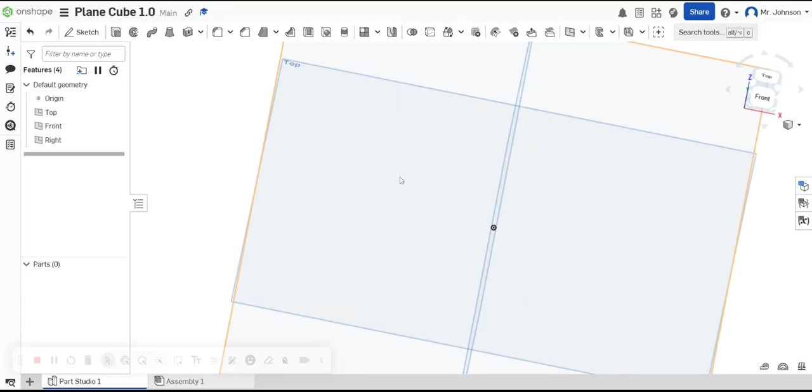Okay, so hopefully this goes smoothly. There's a few things you should know. You definitely want a mouse or a trackball because when you do a left click, it selects things, versus a left click which allows you to highlight things, whereas a right click lets you move things around. Your center click lets you zoom in and out, and also pan back and forth. All of that working together, you need the 3-button mouse to really make this project work.

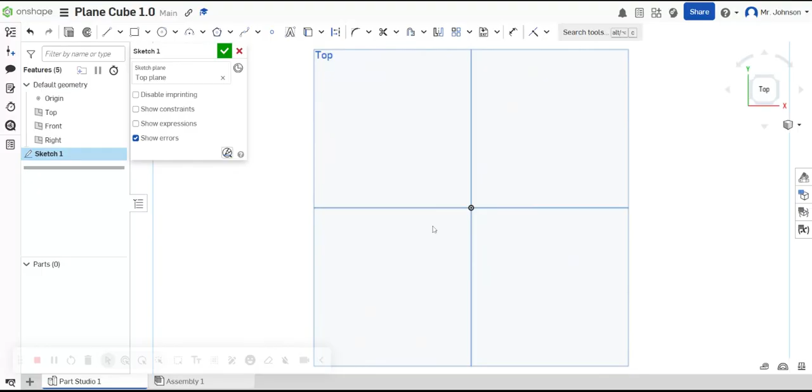So the first thing I'm going to do is sketch. I'm going to hit sketch and click on this top right here so I can make a sketch, and I'm going to go to a top view, so I'm looking straight down on it. There's a few different rectangles you can make. The one I want is a center point rectangle. So I'm going to start here at the origin and work my way out.

Automatically this line is parallel to this line, the top and bottom, depending on how you're looking at it. The left and right are parallel, so that's a rectangle, but I want to make this rectangle a square. So I'm going to come in here and dimension it, click on this little bar and bring it up. I'd like that to be 2 inches. Now I'm going to do this one more time, making that side 2 inches as well. I don't need to do the opposite sides because they're automatically 2 inches since it's a rectangle.

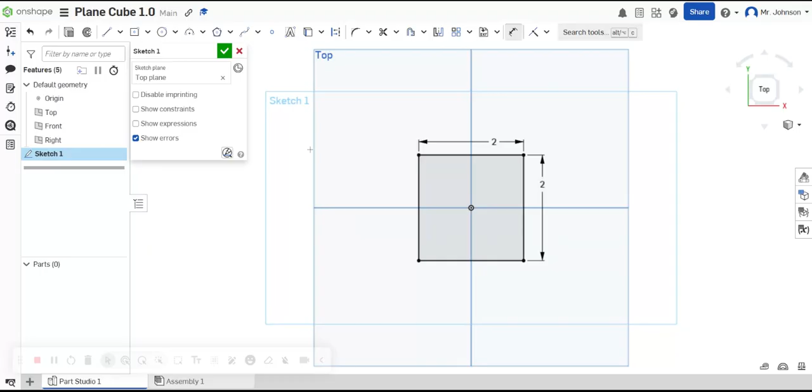Now if you're in centimeters, what you need to do is click on this little hamburger, those 3 little lines right there, and go into workspace units. I have them in imperial units, inches right now. But that 2 by 2 square centered at the origin, I'm good to go, so I'm going to finish up that sketch.

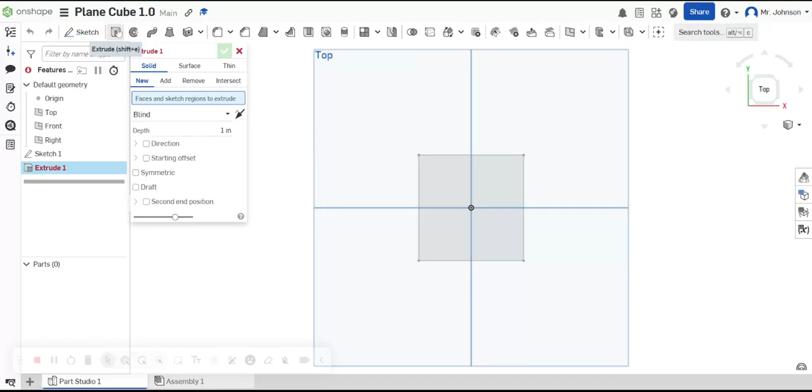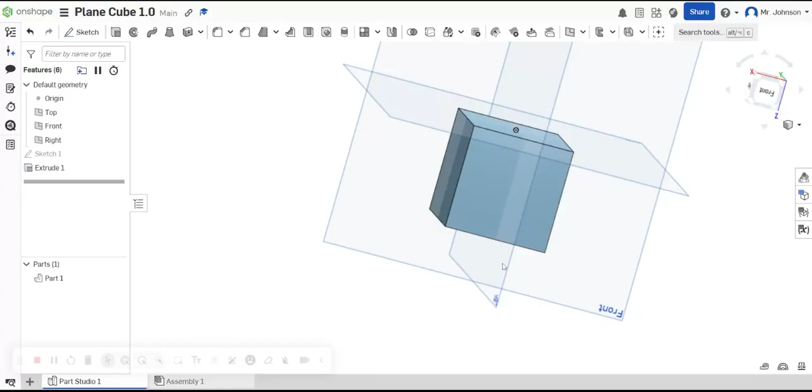Now the next thing, once I finish that sketch, is I want to make this 3-dimensional, so I'm going to use the extrude feature. If I hovered for a split second, that would have been Shift E, which is extrude, and I want to extrude that 2 inches, then click this little green check, and you're like, but that didn't do anything. But if I hold down the right click and rotate, I can see that I now have a cube that's 2 inches on each side. So I drew a 2-inch square in a sketch, and then extruded it 2 inches so I can see all of that.

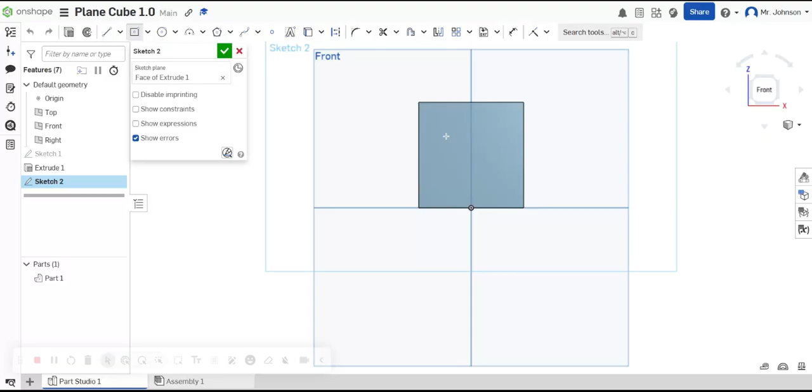Now on any one of these sides, it doesn't matter which one, we're going to create a new sketch. So I'll do a right click, new sketch, and zoom in on the front. In this one, let's go with the square, and I'm going to put a square in the middle here. It doesn't matter which rectangle tool I use, I just don't want it to touch any of the edges. If it touches an edge, it automatically constrains it to be attached to that edge, and that would be horrible.

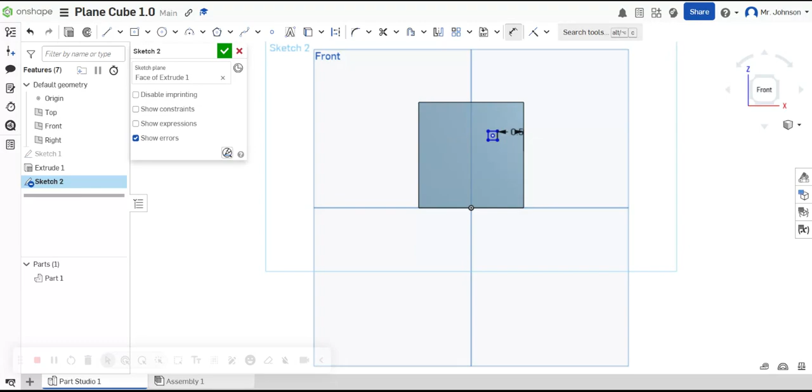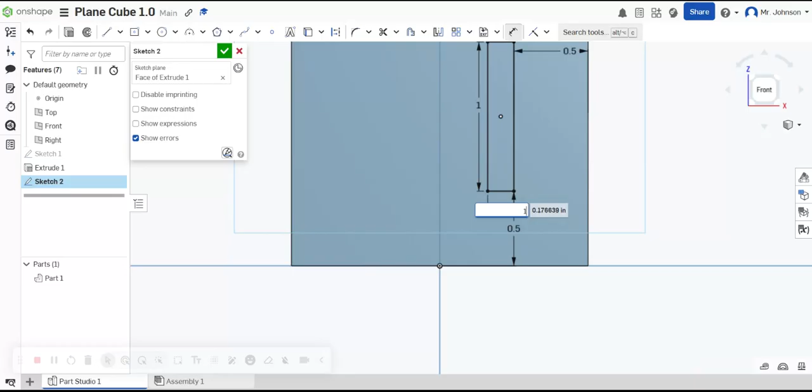At this point, I'm going to come in here and constrain it from this edge to this edge. I'm going to dimension that to be 0.5 or half an inch. You could type 1/2, it'll totally do it. And then from the bottom part to the bottom, again, 0.5 or half an inch. Then I'm going to zoom in using my scroll wheel. I want that to be 1 inch, and I want that to be 1 inch. And I have just made a 1-inch square that is half an inch from each side.

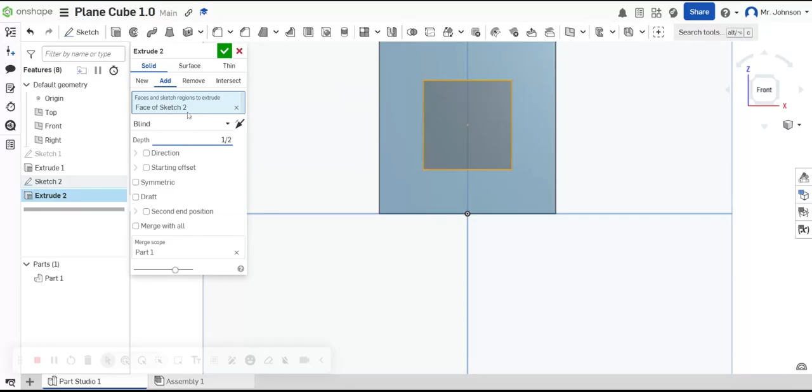I'm going to finish that sketch. I'm going to go to extrude again, and this time I don't want to extrude at 1, I can do 1/2 or 0.5, and I want to make sure it's an add, not a remove, an add. I click that, and so what I'm looking at right now is a half-inch square sticking off the side of that.

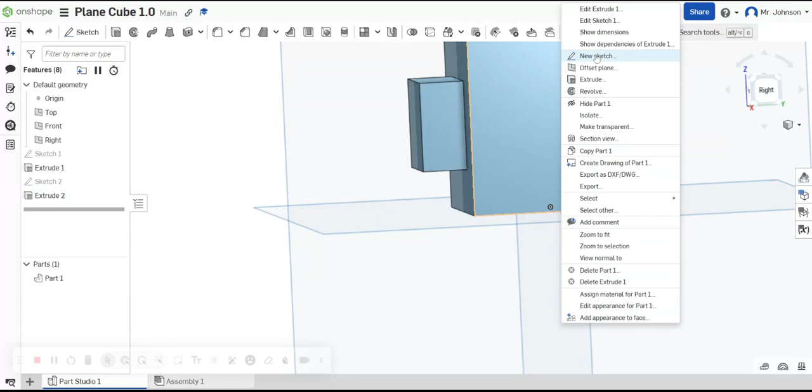Now any side that is adjacent to that, I'm going to come over here and do again a right click. Oops, I'm going to click the green check mark so that I finish that extrusion. I'm going to click right here, new sketch. This side, I'm going to put a circle on it, and there's a couple different circles, center point, that's fine.

I'm going to click on the circle and draw a circle. See, like right there, it's going to center it right above that midpoint, and that's fine. I go to dimension, and I'm going to go into the middle here, and I want it to be a 1-inch circle, and I want it to be a half an inch from the side, so 0.5 or 1/2. And then from the top or bottom does not matter.

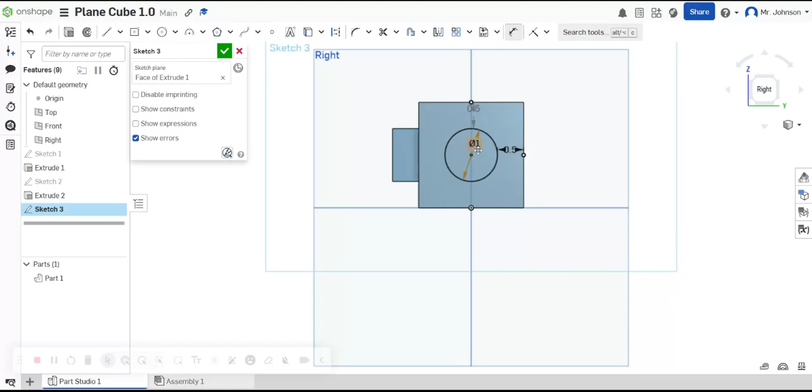At this point, I'm going to finish that sketch. I'll hit extrude again and extrude it a half inch. When I hit the green check mark, I have my circle peg and my square peg.

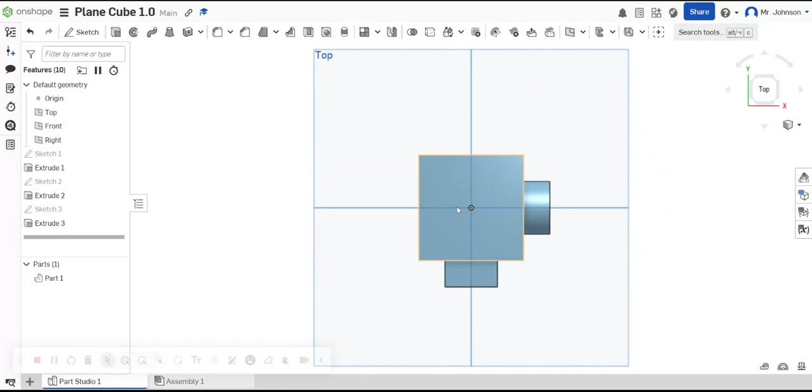Now going to the top here, this one right here, there's a couple different ways I can make a hole into this. So I can come in here, and really the first thing I want to do is create another sketch.

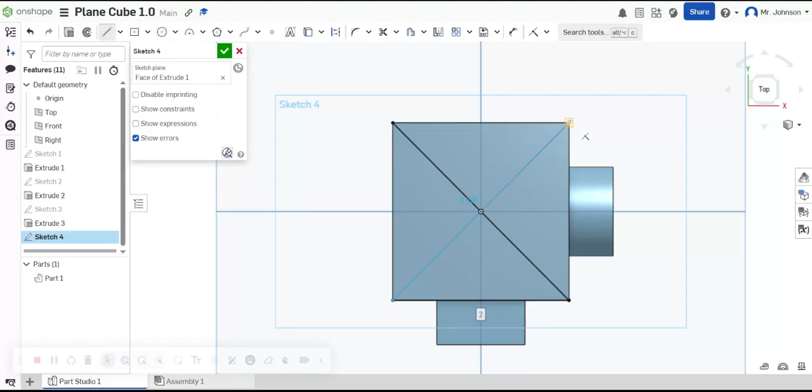I'm going to hit new sketch. There's lots of ways to find the center of this. One, it's already marked, so I could use that. If I didn't know that, I could use the line tool and do diagonals. If I do a diagonal there and a diagonal here, where they intersect is the center of a circle.

When it first starts up, it's like a quarter inch. It's way down here. It's something like this.

So there's lots of different ways to do this. If you're using the hole tool, the cool thing is you could do drilled, clearance, tapped, PM - I don't know what some of this is. I'm going to go with drill. Tapped would be threaded, and you can pick the thread size and do all sorts of different stuff. By default, it's at blind.

There's all sorts of different settings, so if you're using the hole tool, this is where you would go to do it. But for some reason it's not letting me, so I'm going to cancel out of this. Normally what I have to do is go into that sketch 4 and edit that sketch.

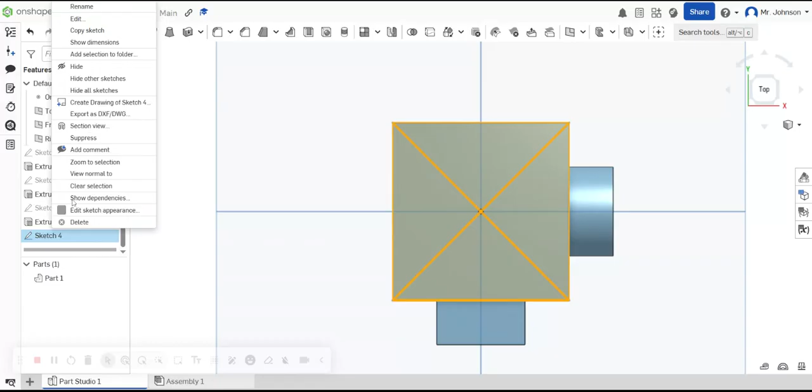I'm going to make a circle right here, using the center point of a circle. Again, I want it to be a 1-inch dimension, so you can just hit D, the letter D for dimension is a shortcut key. 1, enter, and that centered it.

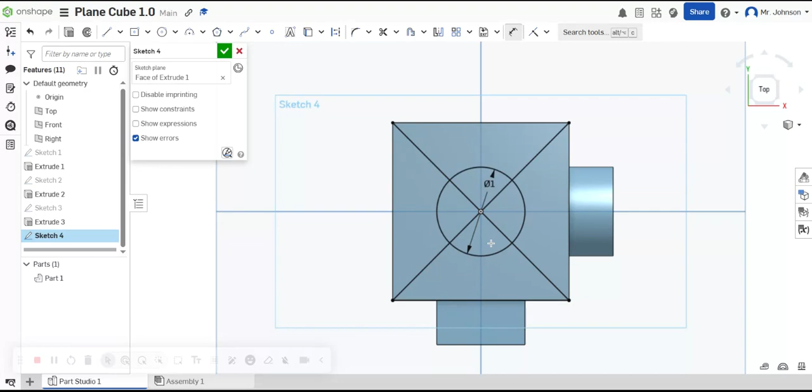That's absolutely centered it. Now if I finish that sketch and go back to the hole tool, when I click here, there it goes. Right now, let's say I did tapped, and it gives me my threads. If I were to orbit this, well, that's not a very fancy hole, it doesn't go all the way through very far, so it doesn't show it as well as it should.

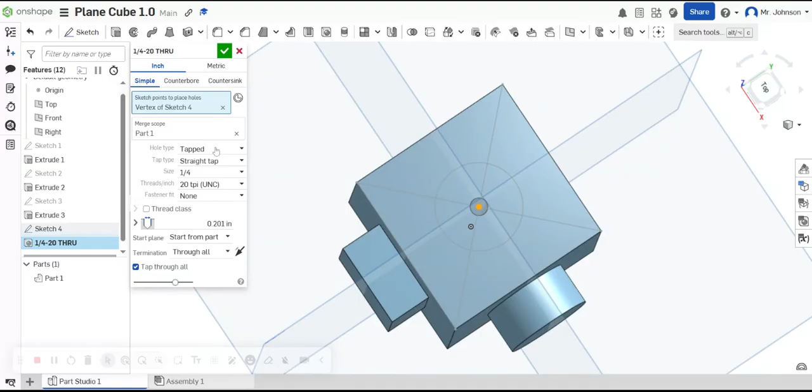But I could use the hole tool and do a 1 inch. So scroll, scroll, scroll, here we go. Where's my 1? 1 inch through all. If I look really closely, you can see that it's threaded.

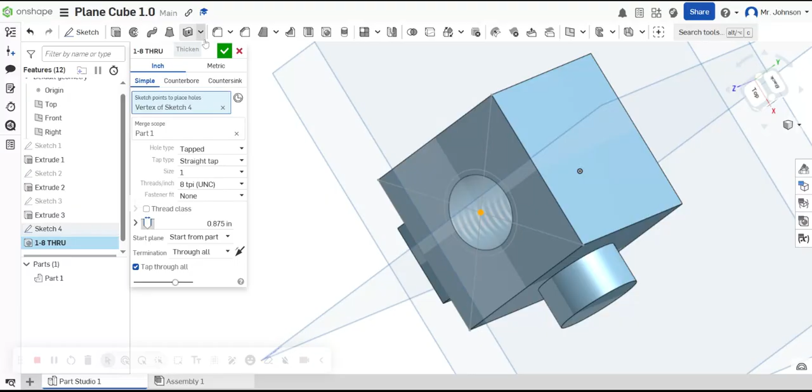So the hole tool allows you to thread the hole. The other way to do that, if I didn't want to thread that hole, I can come in here and do an extrude, but an extrude cut. So I click on extrude, and this time I've got to click all 4 of these little parts, but I'm not wanting to add, I'm wanting to hit remove, and then depth of 2 inches.

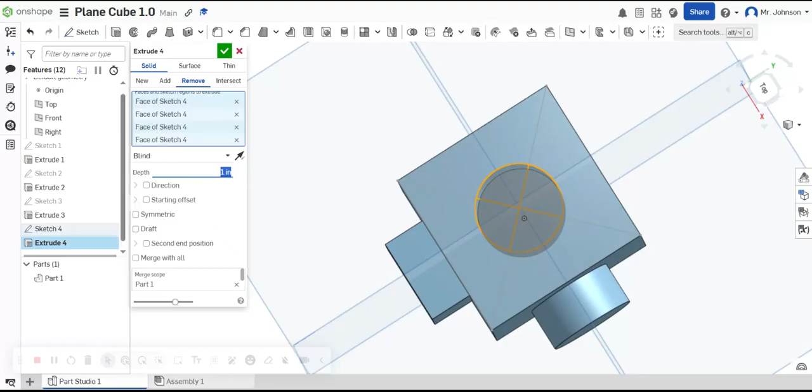And when I do that, it has just - oops, somehow I cut everything. Control Z, or I just ignore that. Okay, let's try that again.

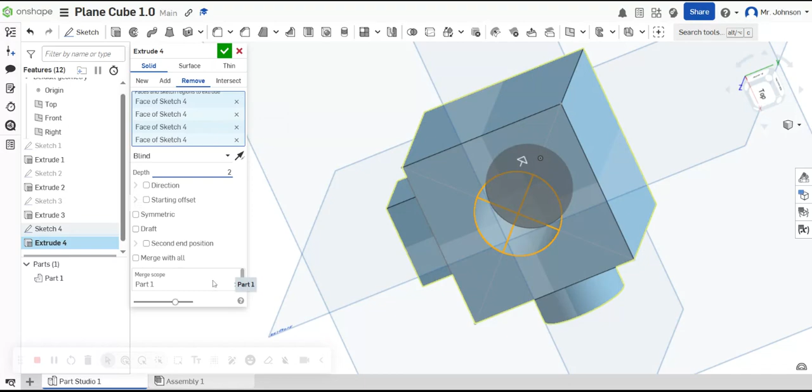I'm going to hit extrude. I want to extrude this, this, this, this, and that. But I want to do a remove, and 2 inches, no offsets. If I do that and hit the green check, it cut a hole all the way through.

So what's the difference between an extrude remove and the hole feature? The hole feature lets me put threads and stuff like that, there's a lot more features. I can taper the hole, whereas an extrude cut or extrude remove just removes all of the information from that spot.

At this point I'm done. Whether you went with the hole or the extrude remove, both of them are going to end up looking the same. But see all this extra stuff? I want to get rid of that.

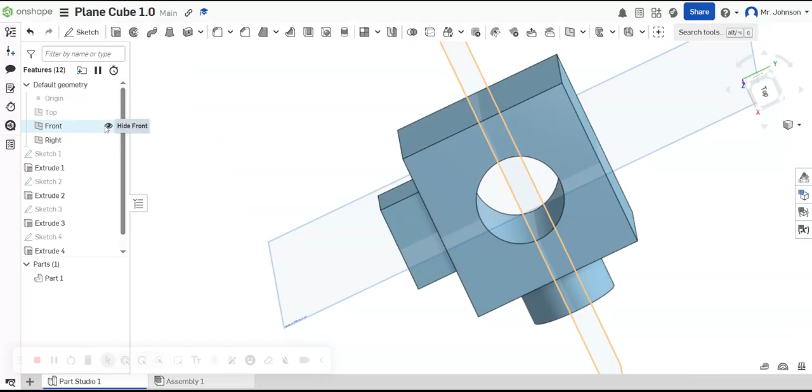So I'm going to come in here. The first thing I'm going to do is click that little eyeball for the origin. I'm going to click it for top, and click it for front. I'm just hiding them. And at this point, I've got my cube, it's all set and done.

But there are two different ways to cut holes in things. One is to use that hole tool, and the other is just to do an extrude remove. Either way, whichever one you want to do there.

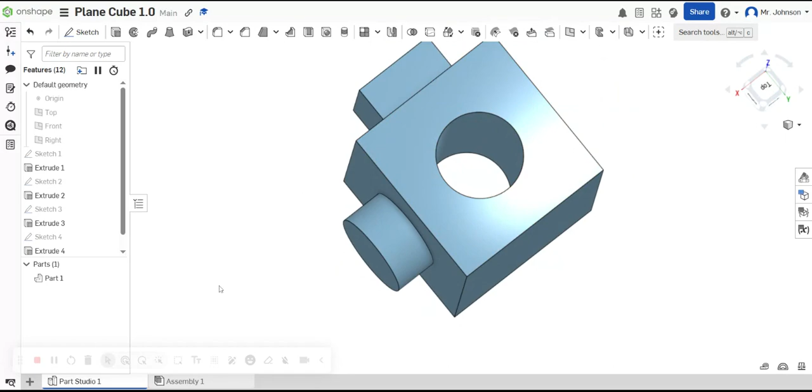If you hover over everything, you can see the different shortcut keys - that's one of the questions on the worksheet. You just hover over stuff, and anything that says there's a shortcut key, like right here, Shift W for revolve, Shift E for extrude, or in your sketch, when you're doing sketches, there's also a bunch. Just kind of hover over everything and see what the buttons do. I'll see you in the next video.